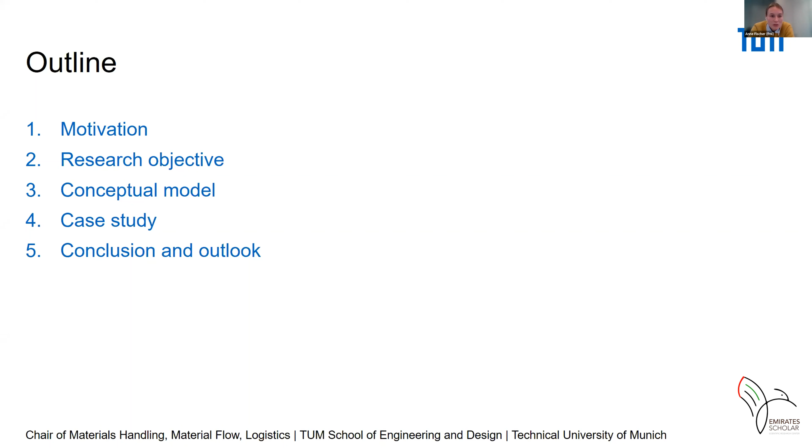So short outline: I just give you a small presentation of the motivation, then the research objective. Afterwards, I will present you the conceptual model and the case study to validate the model. And in the end, we will see the conclusion and the outlook. So what is the initial situation of the topic?

Today, the construction industry has to deal with requirements such as increased time and cost pressure, as well as increasing complexity. And to meet these challenges, the construction industry harnesses digital technologies, the so-called construction 4.0 technology, and they network the machines or the equipment and materials, so all entities on the construction site, as you can see here in this picture. And in parallel, in the last decades, computer-aided simulation approaches have been further developed.

As already seen in this track, the usage of process simulation, the so-called discrete event simulation, is a proven tool for testing complex systems in advance and for validating variants with minimal effort. And there also exist different levels of simulation approaches. In a previous work, we divided it into a macro simulation and a micro simulation. And we combine these two approaches cyclically to first profit from the project scheduling of the macro simulation, and second, include the telematics data of the equipment on site to update the project schedule cyclically.

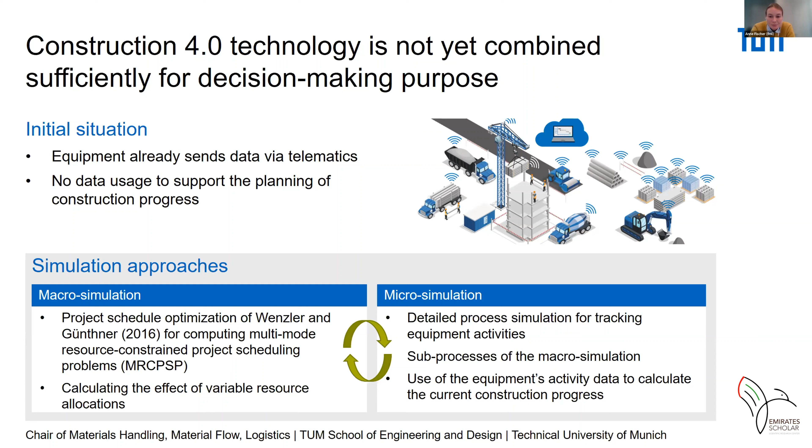However, in order to give you a better understanding, you can see here a control loop, to give you an impression of the objective. So we have here the macro simulation based on boundary conditions and the dates, like the end date. Then we also have a micro simulation to evaluate the construction progress. And what is missing now, but I will present it in the next minutes, is the meso simulation to also study variants on the construction site. And in the end, we have something like a digital twin.

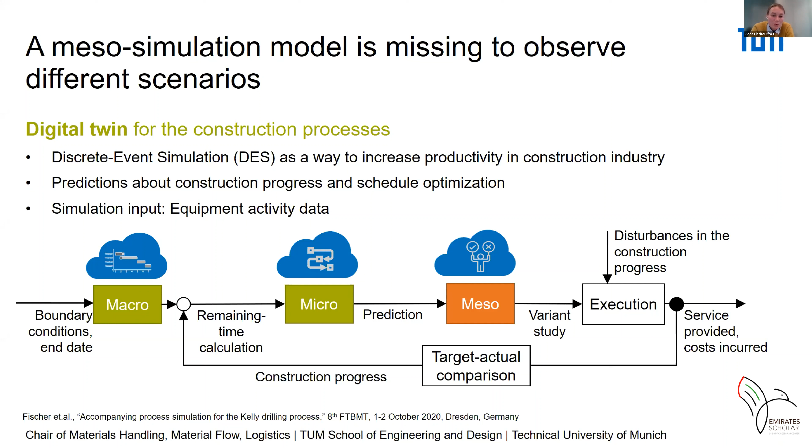So we have the execution on the construction site, and by using the telematics data of the equipment, we can push this back to the simulation to update the simulation based on this data and to vary different scenarios. And in the following, as I said, we will concentrate on the meso simulation, which will be the third part of our simulation approach. And this is the concept.

So we have different phases on the construction site. In the first step, the user initializes the meso simulation model and creates different alternative scenarios, for example, by varying the number of equipment or different types of equipment. Then dynamically, it will be shared via SQL database to the macro simulation to compute an optimum schedule. And during execution, the data is transferred to the micro simulation, and we can update the telematics data via the micro simulation and calculate the construction progress.

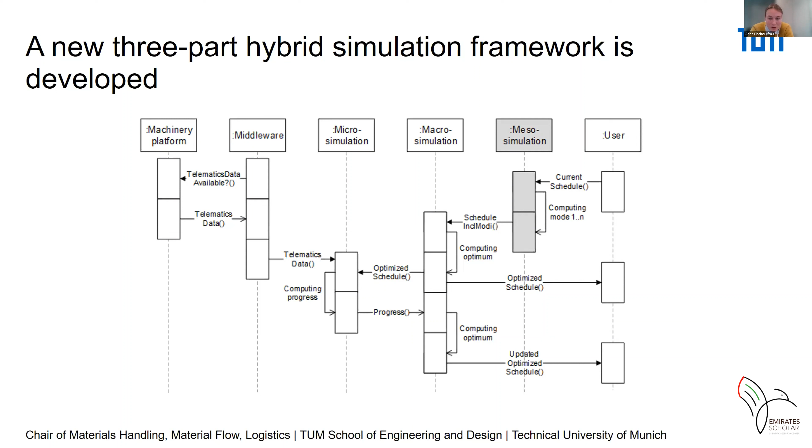So the current state is then passed to the macro simulation, which calculates the optimal resource scheduling and its total duration. And based on the optimized schedule, the user has the opportunity to compute different modes via the meso simulation, which serve as the basis for decision making and the execution.

We chose a very modularized meso simulation model to capture different kinds of construction processes. Here we have, on the one hand, standard elements for initialization, but also data import. Then we have different construction site specific elements to represent the process steps, but also the construction layout, like an equipment gate or the vehicles.

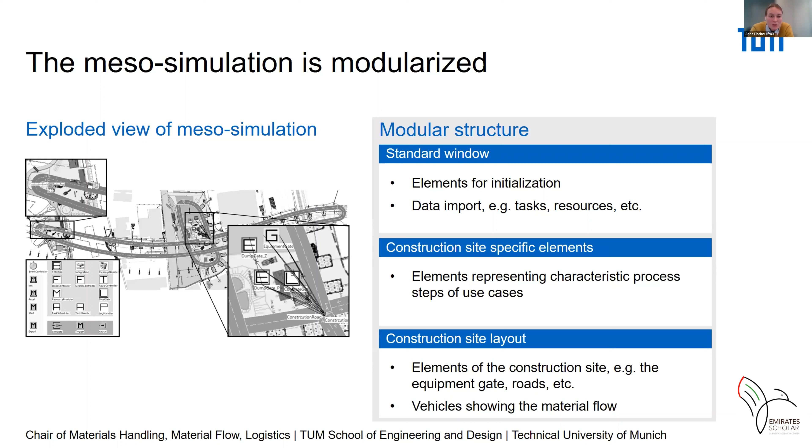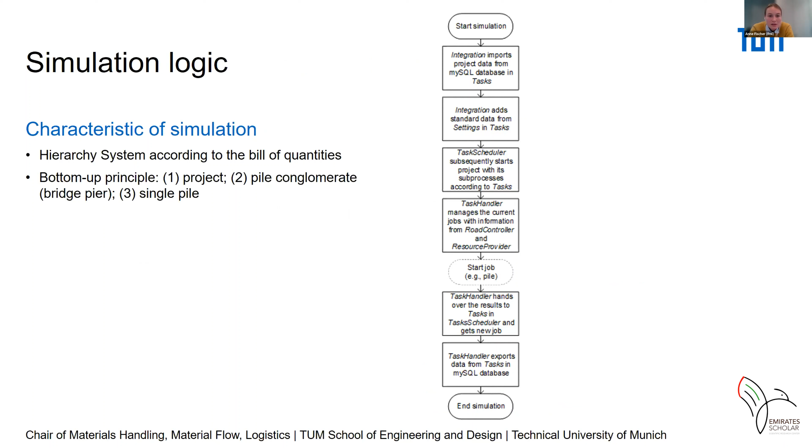And here you can see the simulation logic, which is hierarchical and also follows a bottom-up principle. We start with the integration of the data, of course. Then we have different tasks, and the tasks are according to the bill of quantities. And when this job starts, we have another kind of branch to get across the different activities of the single process. And here you have also the process which we focus on.

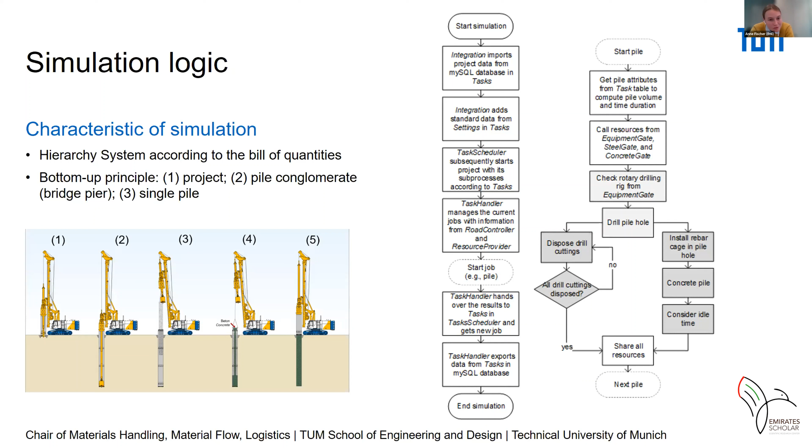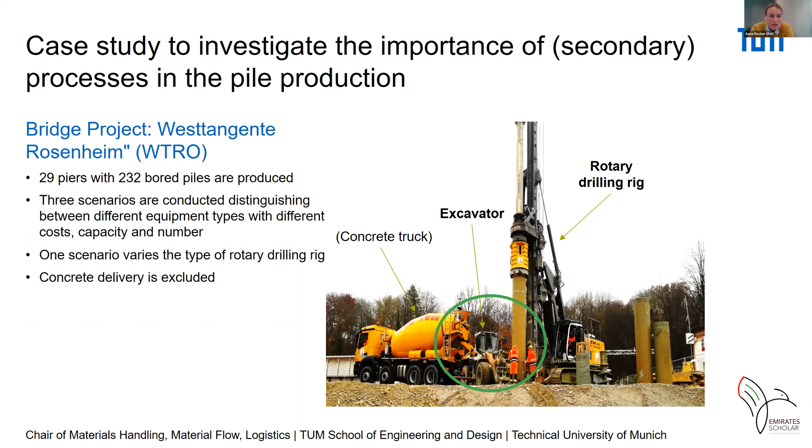This is the pile drilling production with the Kelly drilling rotary drilling rig, and this is the focus of this work. But not only this rotary drilling rig, but also the excavator. So we wanted to investigate the importance of the secondary processes. So we did some alternative scenarios to compare these.

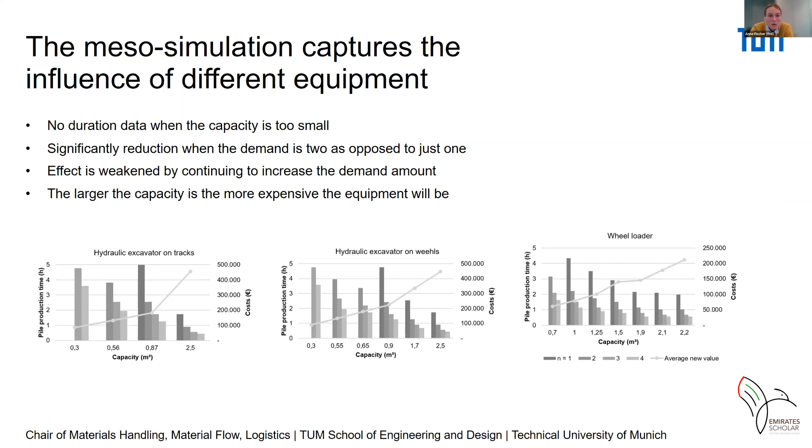We focus only on the earth moving equipment, which you can see here. We have the hydraulic excavator on tracks, on wheels, but also the wheel loader. And we can see that there is a significant reduction when the demand is more than one equipment. We have also a weakened effect by continuing the increase if the demand is increasing, and the larger the capacity is, the more expensive the equipment will be.

And in the end, we had an existing hybrid simulation model, which we extended towards a meso simulation. We captured there the material flow on site in advance, and also the different sub-processes. This current meso simulation is, however, limited. For example, we didn't use different kinds of probability distributions, it's very hard to adapt the model if you want to change the modes, and also it's not possible to model a parallel construction site project, like if you have two rotary drilling rigs, for example.

And as an outlook, we want to, of course, improve the model, but also extend it to analyze the resource sequencing.